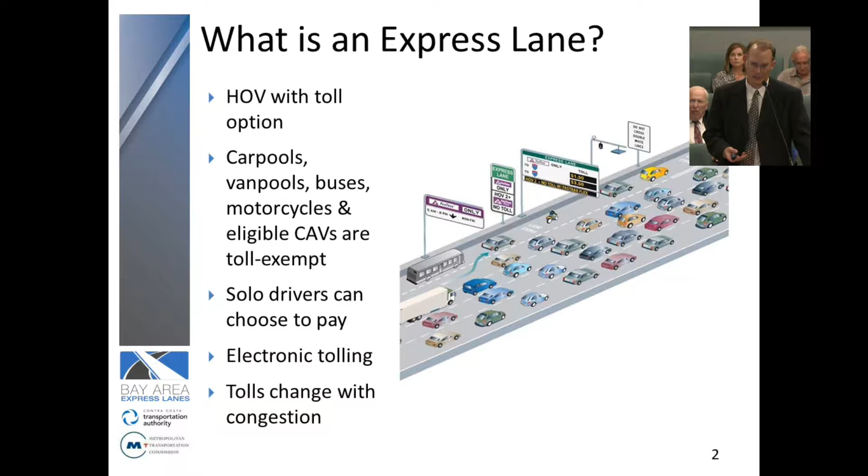An express lane, as you've probably seen driving the corridor with this sequence of signs, is a facility that allows single occupant payers, toll payers, to make use of the capacity in the lane. If you're an HOV today, you use the express lane or HOV lane for free. In the future, when it's an express lane, you'll still be free, along with motorcycles and clean air vehicles. If you're a solo driver, you could pay to use it with a toll tag or toll transponder, coming up here in the slide.

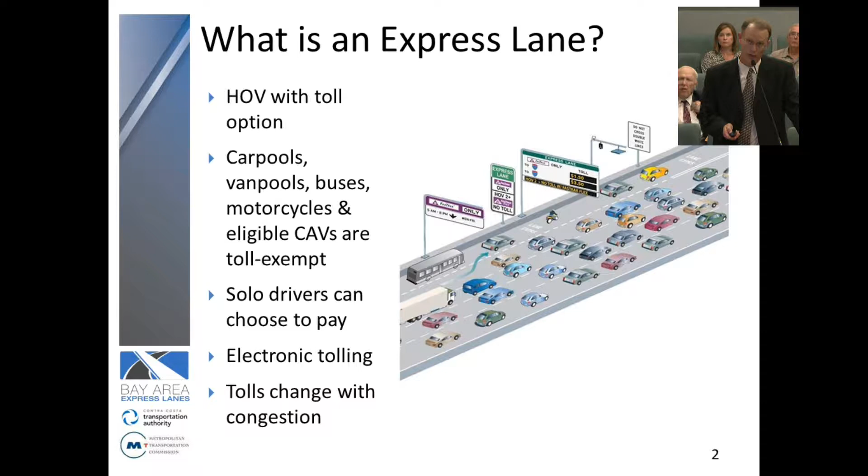The idea behind these lanes is to encourage carpools, van pools, and express buses to make use of the lanes as they do today, and allow for the best use of the remaining capacity by selling it, drawing cars out of the general purpose lanes to reduce congestion and giving the buses and HOVs a reliable travel time in the express lane.

The operating hours for the facility opening next Monday, as well as the facility we're talking about tonight, will be from 5 a.m. to 8 p.m. That makes it consistent with the hours of operation along 580. If you've driven that corridor, you've no doubt seen that facility. All Bay Area express lanes will have the same hours of operation, rolled out on the various facilities from 5 to 8 as we move through their development.

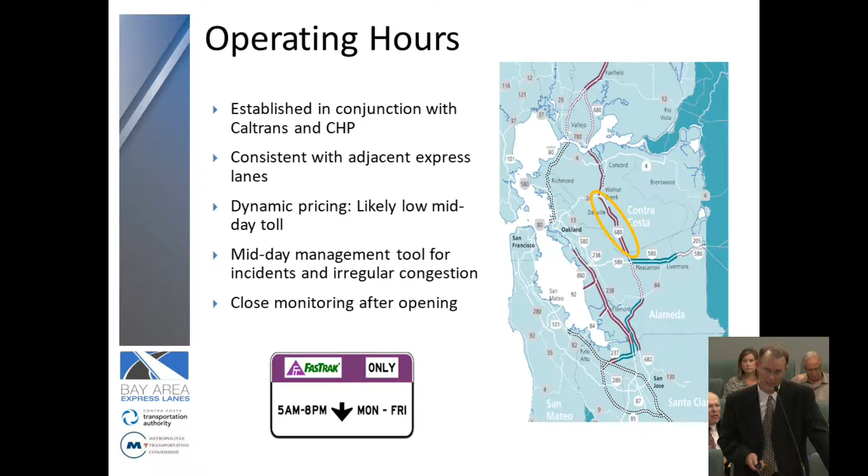That allows for midday management of incidents along the road, and it allows for close monitoring. There will be close monitoring throughout the process as the lanes open and work their way into a long-running operation. All right, and how do we enforce that?

As the vehicles pass by the CHP, the system identifies them based on what their toll tag says, whether they're a single occupant or a carpool. If it's a carpool and the CHP can observe there aren't sufficient passengers in the car for it to be a carpool, then they would pursue that car and pull them over for an enforcement stop.

The revenue allows for enhanced enforcement in the form of more CHP officers. CHP officers are contracted to enforce the lane specifically, as opposed to what happens today on a regular carpool or HOV lane, where the CHP just does it as part of their routine budget and simply don't have sufficient funds to maintain specific enforcement of the HOV lanes.

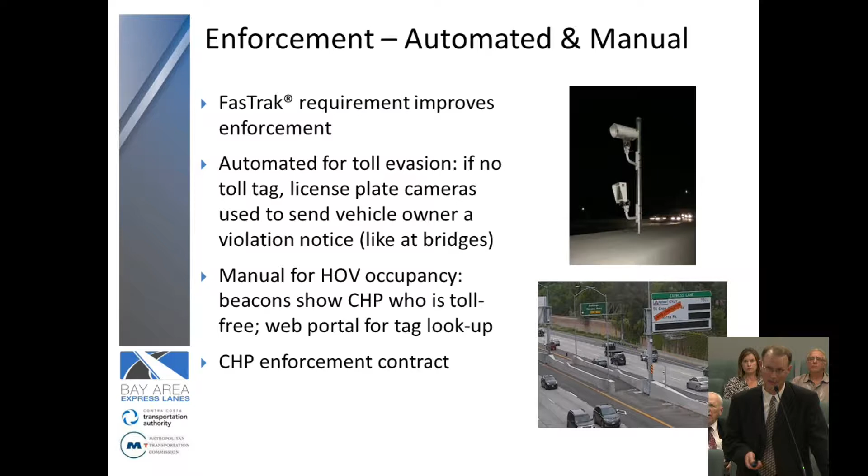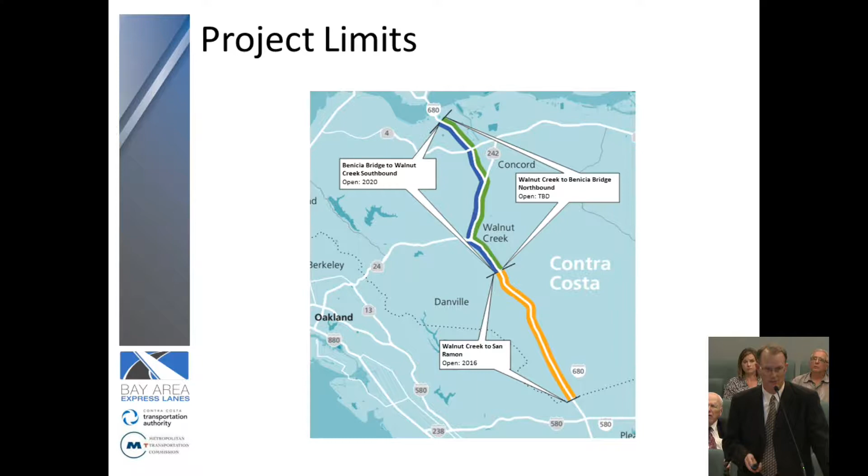So to shift gears, the southbound project we're talking about tonight runs from the Benicia Martinez Bridge, the blue line on the left side, all the way down to Rudgear, where it connects with the current facility being opened here on Monday.

The timetable for this: we've been working on the design through 2016 to 2017, but we're approaching the point now where we're getting ready to do the utility relocation and tree removal. Construction will run through 2018-19 and then into 2020, because we have quite a bit of testing, as you've now witnessed on 880, to make sure the toll system is operating properly. Ideally we open in late 2020, but with rain and other things we might experience, 2021 could happen.

We will have a buffer that starts as you drive southbound, starting at about the 242 interchange. That buffer will extend all the way down to just about North Main Street, where it opens, allowing vehicles to get out of the facility to reach 24 westbound. Similarly, it'll be open until you get south of the 24 on-ramp to 680, and then it will close right about Rudgear and stay closed for access until you get down to about Stone Valley Road.

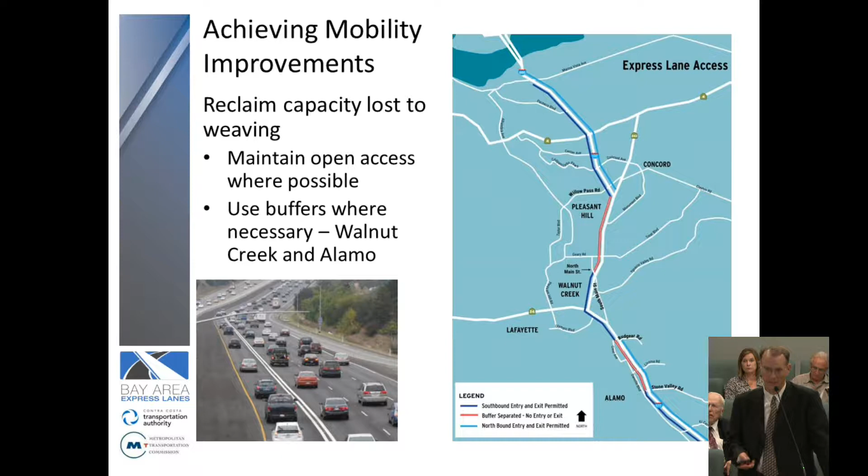In order to do that, the HOV lane today stops at Treat and picks back up at Rudgear. We need to connect that, so we have to widen the freeway. We're widening a bit in the North Main Street area, primarily around the North Main Street on-ramp, and again we have some widening to do right at the Ygnacio Valley on-ramp.

Most of the added width is already available in that area, so most of what we'll create is restriped lanes. Once you get south of Olympic, though, Caltrans has required us to widen the freeway, so we're going to tear down the wall that's there today and move it 10 feet outside of where it is, toward the city street, in order to add the lane in that stretch. So there's widening work there, and also widening at the Rudgear on-ramp.

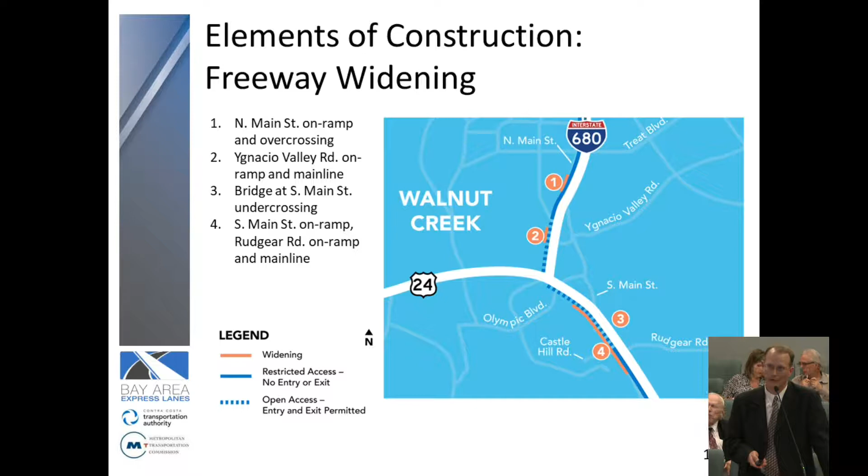So, city improvements. As part of what we're going to do in the city of Walnut Creek, we will be undergrounding some utilities at the interchange. We will complete the sidewalk on South Main Street between Sunnyside and Brookdale Court, add new signals at the South Main Street on-ramp, resurface South Main Street between the overcrossing and Sunny Court, add a lane to the Rudgear on-ramp, and replace the trees we take out in order to conduct the widening.

The timeline for this is a little unusual because we have some gaps, and that's one reason we wanted to present this to you. We'll start with utility relocation later this month, then remove the trees. The trees have to be removed when nesting season isn't occurring, so we can remove trees November through the middle of February.

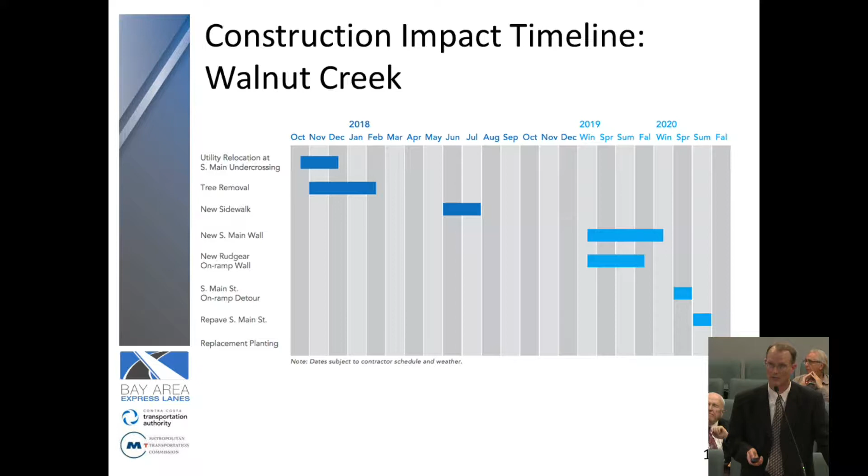Then you won't see a lot of activity because we'll be advertising the main contract, which begins in spring. What you'll see to start the work is the sidewalk reconstruction. There will be a fair amount of work up on the freeway before we actually remove the wall, which you won't see until 2019. The last things I want to highlight are the repaving of South Main Street towards the end, and the replacement planting in 2020.

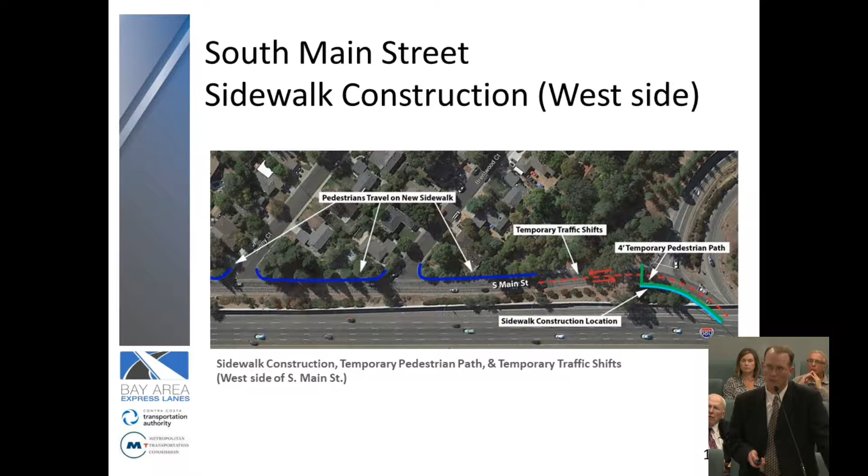There will be some other improvements to the sidewalk right around the off-ramp interchange. We're going to reconfigure that, so there'll be some work there as well. And here's an image of one of the stretches where the sidewalk will go in.

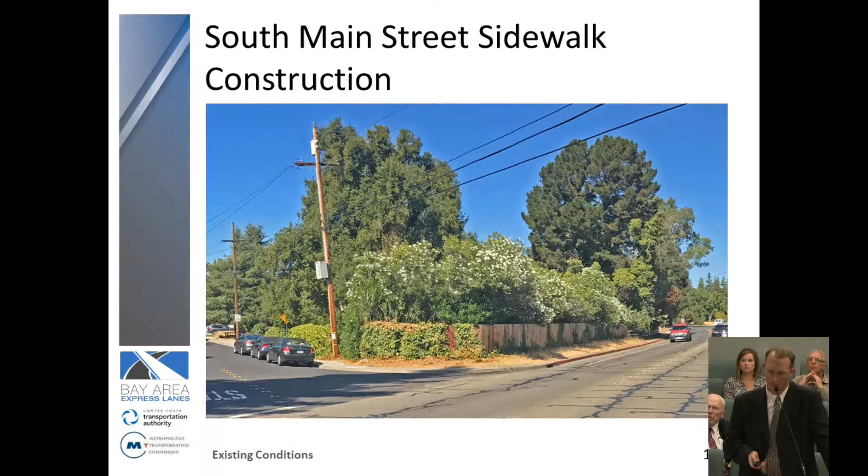One of the other things we have to do is reconstruct the loop ramp, the loop on-ramp, because of the configuration of the widened structure—we have to climb faster. To do that, we've got a grade difference of 6 or so feet. You can't close that gap overnight, so we'll have to close the ramp for about two weeks.

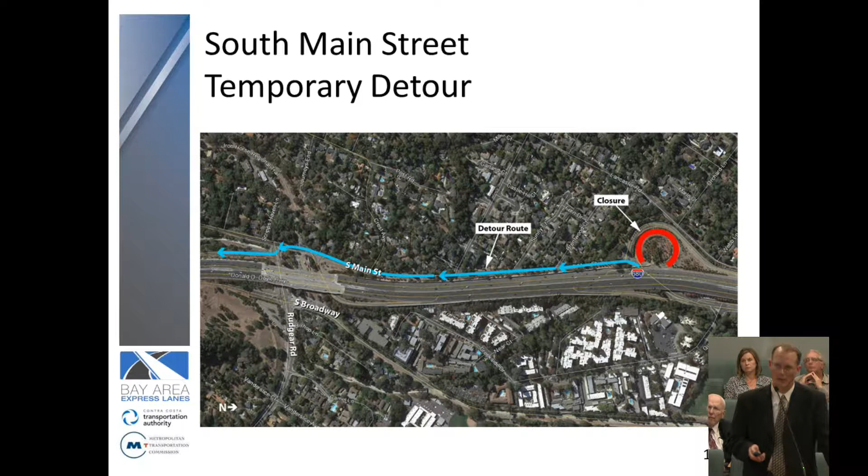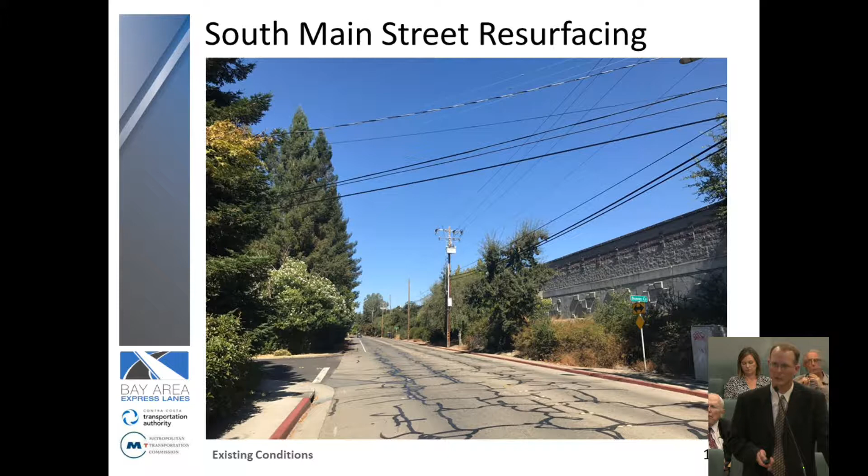When we do that, which won't be until late 2019, we'll have a detour running vehicles choosing that off-ramp or on-ramp down South Main Street and then onto the new Rudgear on-ramp. Then we'll come back and resurface the street after we've driven over it with extra cars and construction equipment to get to the work, and that's the last piece of work.

What we wanted to finish with was to let you know how we intend to communicate with you and your citizens about the project. We've been at work over the last couple months—one thing is launching a website, and we've held a number of meetings with council members, the mayor, and staff. As we move toward beginning the work, we're launching a project hotline so citizens have a place to call as well as a website to turn to. We also intend to launch a quarterly newsletter.

That will go out tomorrow to introduce the neighborhood meeting on October 25th, which will be at Parkmead Elementary School, the venue we've held prior meetings at for the project. Caltrans and CCTA felt it was important for us to meet there again, so we'll be back at Parkmead on the 25th.

We will continue to coordinate with the Walnut Creek communications team to keep your staff abreast of what's going on. Prior to the closures and detours over the next 2 to 3 years, you'll see signage, detour maps, and press releases as well, so we'll try to keep you well informed as we move along. With that, I'll conclude my remarks and take any questions.

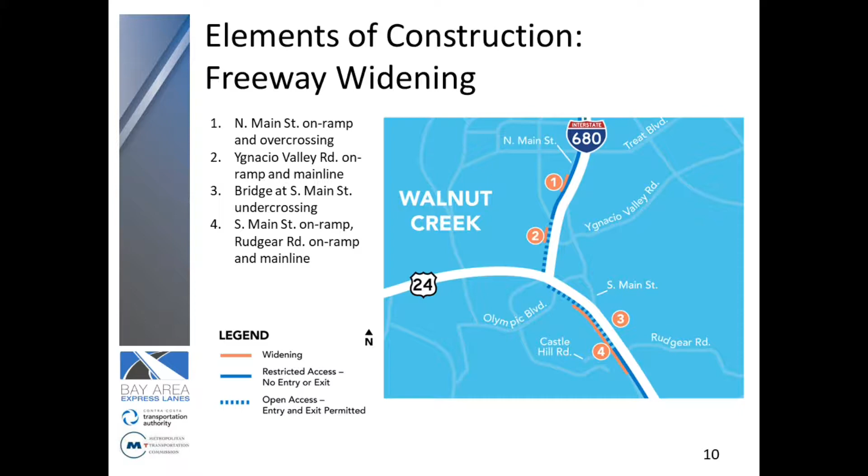Part of the work will be done prior to the demolition of the wall. We actually have to create a retaining wall behind it in order to tear it down and rebuild it. That work will be done at night before the wall comes down — driving piles to create a retaining wall to hold back the dirt that the current wall holds back. So that'll happen before the wall comes down, and then it gets rebuilt, and that'll last about 11 months.

I was recently talking with a friend who lives near the interchange and went through about 2 months of night work right above his home, during the widening for the interchange 25 years ago when the flyover changed. He said they were housed at night in a hotel for a couple of months because of the amount of work and the noise. Are you looking at that as a potential mitigation for the people who live right next to this? We have not looked at that.

The noise from the work that will take place here will happen during the day, not at night. So the night noise will just be the traffic on the freeway — traffic that you can currently hear, or at least it's mitigated because of the sound wall.

We're looking at doing the brunt of the construction during the daytime, especially the noisier things. I believe the piles will be cast-in-drilled-hole, so those won't be quite as noisy. We are concerned because of the length of time the sound wall will be down and the noise levels, so we will be out there observing and monitoring, thinking about what we can do. We considered whether there's somewhere for a temporary wall.

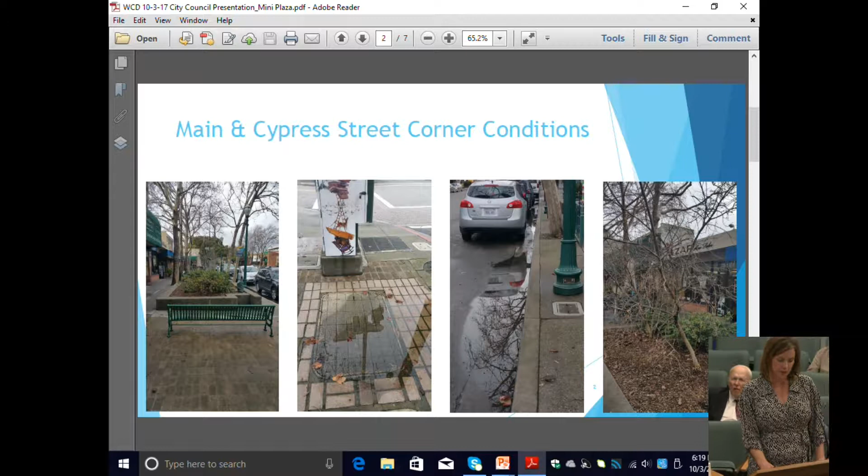Earlier this year, City Council authorized funding for Walnut Creek Downtown to lead the creation of a mini plaza in the traditional downtown, located at the corners of Main Street and Cypress Street. Today there are a couple of photos of what it currently looks like.

To give you a recap of our project progress to date, in February of 2017, Council allocated additional funds of $847,500 to completely fund the project.

Once the design concepts were begun, along with the engineer, an engineered physical survey of the site was included. It was determined that Main Street drainage patterns would be significantly and adversely affected, so impacts would require an additional $300,000 for storm drainage solutions.

To be clear, we are not here to ask for an additional $300,000. We understand that we need to be fiscally responsible, and as a result, we adjusted the plans to include the existing drainage. Then last week, we received the updated designs.

This evening we have our committee members, which include Brian Harahara and Joseph Gorney, and I'd like to introduce Joseph to give you an understanding and a recap of our current design.

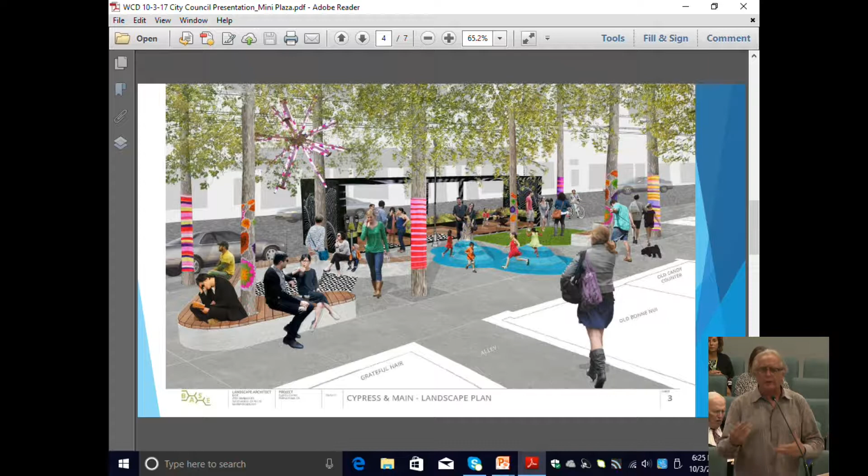Well, thank you, Kathy and Joseph. It is unusual to see you on that end of the podium, but do we have any questions? Cindy looks like she's got a question. Thank you very much.

So give me an estimate of the time frame now. I have no idea, to be honest with you. I think spring, they're looking, that's right, it's in here actually in the drawings. If you want to continue in the drawings, you can see some of the other pieces. I believe they're looking at starting in spring of 2018.

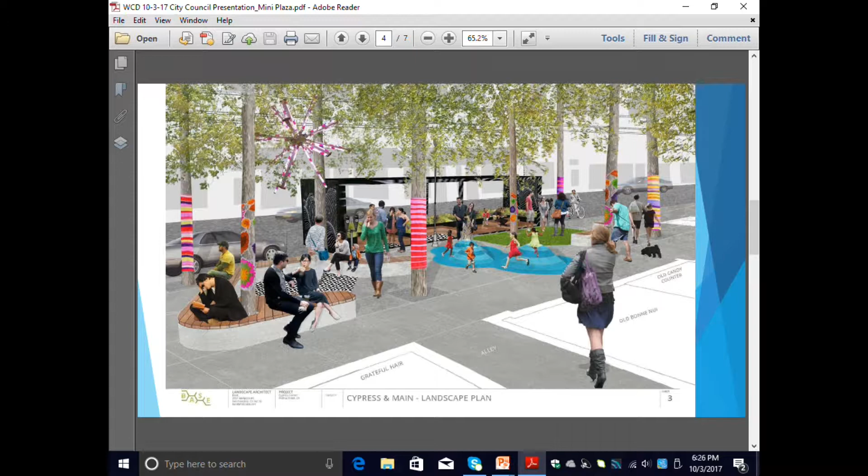I think you get to move the drawings. Oh, that's right, I have to. Can I just tell somebody else to do this? Here we go, okay, let's see.

Spring 2018. So as you can see here, we're doing the design concept now. We're going to talk to the neighboring businesses and property owners, a little bit of community outreach in the neighborhood over there. Construction beginning after the holidays.

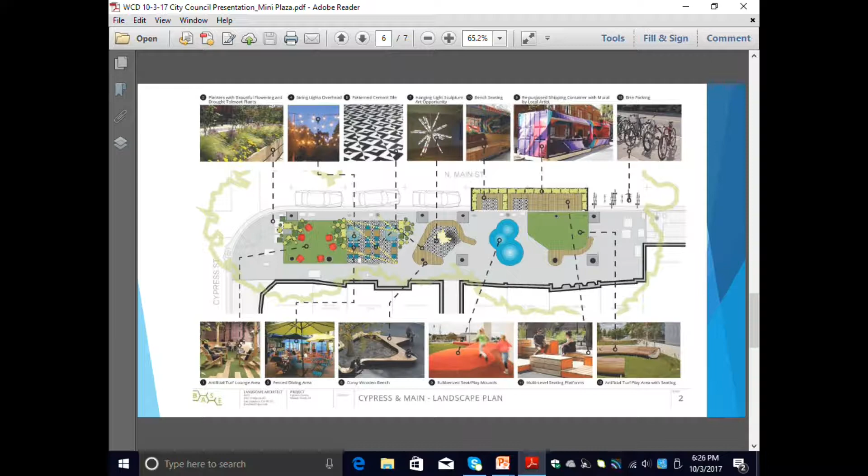Can you go back to those other drawings? These are some drawings that are just images that Andreas put together based on other things that they've done and other people have done. So this preserves 3 of the parking spaces when the temporary piece is in. Otherwise, it could conceivably preserve all of the parking spaces. Yes, and we looked at parklet ideas and different things, but because of drainage issues, we didn't want water sitting underneath them all the time, so it didn't seem to be the best solution. And whether we use 2 or 3 or 1, or split them, it's something we're still exploring.

Any other questions?

Again, thank you very much. I think it's an exciting idea, exciting approach. I'm curious to see how the container would actually fit in. And I love the yarn art and those types of things that are on the trees. Again, great, thank you very much, Joseph and Kathy. Appreciate your presentation. Thanks for taking the time.

Okay, now I'm going to take something that's not necessarily on the agenda, but as you look around our police officers, you're going to notice a patch that looks like this. It's a Walnut Creek police patch with some additional additions. I'm going to ask Lieutenant Jay Hill to come up to the podium and explain what this program is, because it's a very important program for every member of Walnut Creek to know about.

It's Captain Hill. Did I say Captain? You said Lieutenant, but that's okay. Oh, I'm sorry, I'm not quite all up to date. Captain Hill, thank you, Mayor and City Council members, for giving me the opportunity to discuss this real briefly.

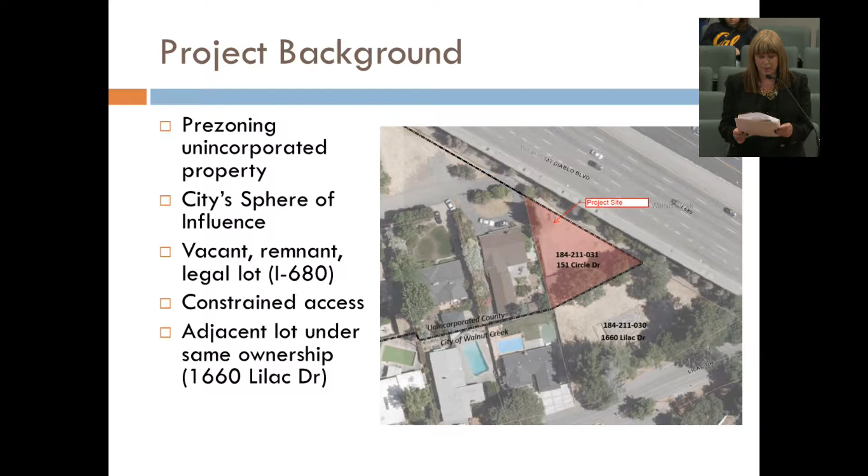The pre-zoning application is for a vacant triangular-shaped property at 151 Circle Drive. It is located within unincorporated Contra Costa County and also within the city's sphere of influence, indicating that the city has previously contemplated inclusion of this property within its limits. It is a constrained remnant lot created by the widening of Interstate 680 in the 90s, and given the unusual triangular shape, the property currently does not have access to or from the adjacent roadway at Circle Drive.

The applicant for the property at 151 Circle Drive submitted an application to the Local Agency Formation Commission, also known as LAFCO, in March to annex the property into the City of Walnut Creek. As stipulated by LAFCO, the land must be pre-zoned prior to annexation so that when the land is annexed, the zoning has already been determined. The applicant then submitted an application to the city in June to pre-zone the property to single-family residential R10 zoning district.

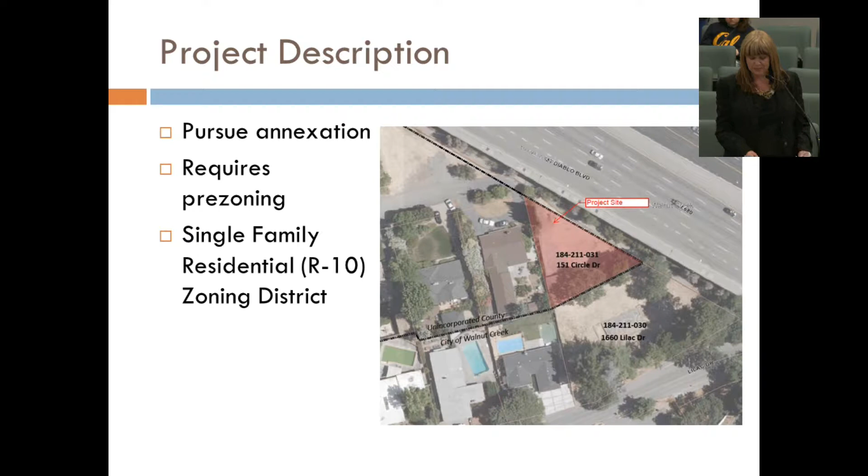To give you a quick overview of the annexation process, pre-zoning is just one of a series of steps, which also includes confirmation to LAFCO that the master property tax exchange agreement with the county applies in this instance, and provision to LAFCO of a will-serve letter that the city will provide services upon annexation. Both of those actions have already occurred, so pre-zoning is the final action before you tonight. Should City Council approve the pre-zoning, LAFCO will then make their decision whether or not to approve or deny the annexation.

Staff conducted a consistency analysis and found that the proposed pre-zoning is consistent with the regulatory and surrounding physical context. The project site is located within the sphere of influence and has a general plan land use designation of single-family medium residential, which is consistent with the proposed zoning.

The proposed zoning is also consistent with the current zoning on the site under the county, which is also R10, and it's consistent with all of the adjacent properties, which are also R10 single family residential.

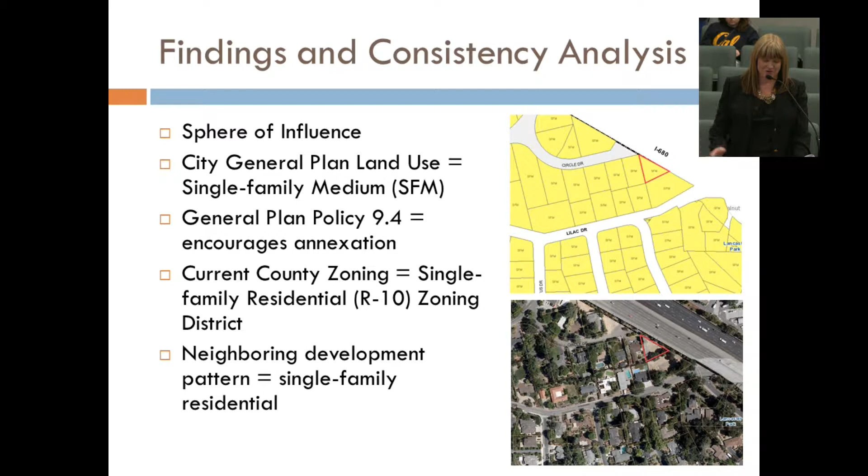We took this to the Planning Commission on August 24th, and they provided a positive recommendation to City Council to pre-zone the property to R10. There were a few points of clarification during that meeting, and through discussion it was confirmed that utilities would continue to provide service upon annexation, that access to the site could be provided from the lot to the south, also owned by the same property owner, and that the lot would meet city standards with a lot line adjustment.

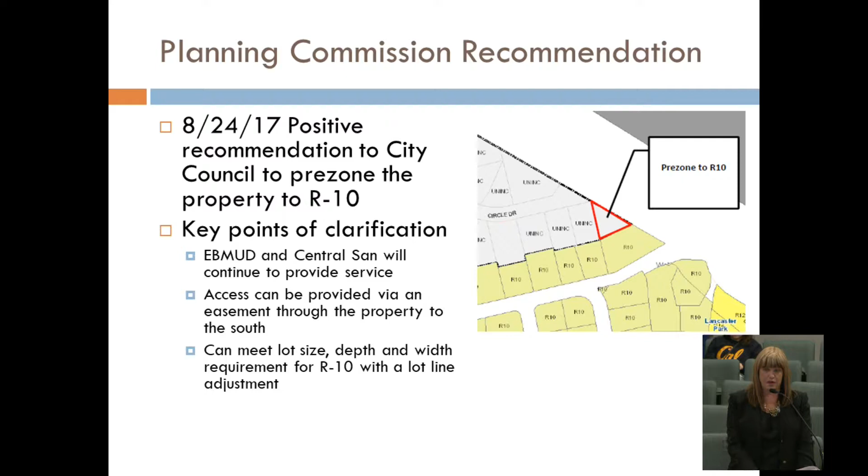Staff recommends that the City Council introduce and waive further reading of the ordinance as shown in attachment 1, to pre-zone the subject parcel to the single-family residential R10 zoning district. Such zoning will become effective upon annexation of the parcel into the city of Walnut Creek. This concludes my presentation, and we are now available to answer any questions.

Thank you. Thank you very much. Any questions? Go ahead, Kevin. Thank you very much, I just have a quick question.

Is there a downside to us not annexing? That is a good question. I would say the downside to not annexing is that the property will likely continue to remain vacant with a deteriorated garage on the site. So the downside is really blight, by not annexing. Right. Okay, thanks, that's it.

Cindy? Can you clarify the amount of the size of each of the two parcels, both the one on Lilac and the one on Circle? The one on Circle Drive is just under 8,000 square feet, and the one at 1660 Lilac Drive is almost triple that, about 22,000.

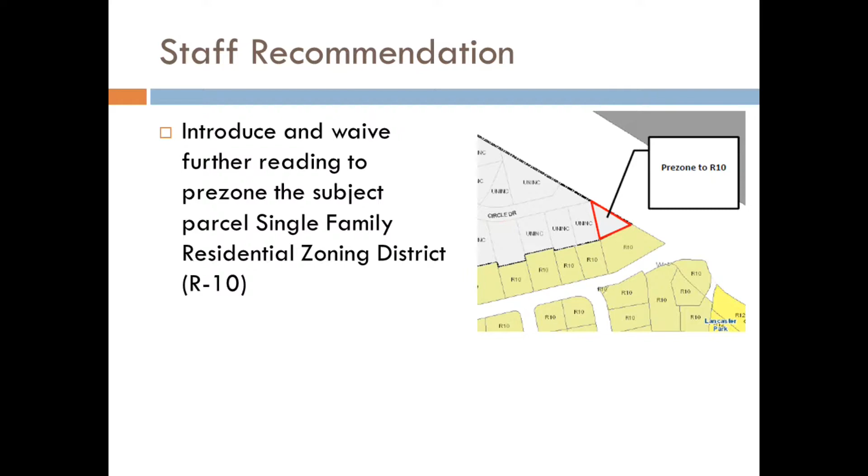Okay, so the subject parcel is 7,843 square feet. The 1660 Lilac Drive is 21,298 square feet. So about 29,150 square feet total, just short of 30,000 square feet.

Now, this is proposed to eventually become two lots at R10, which is basically our 10,000 square feet residential. Correct. So the two lots will be larger than that. Is there no way, or why is it not possible to put 3 lots on the site?

In order to provide access to the 151 Circle Drive, an easement would be required, a minimum of 16 feet wide to accommodate a fire apparatus. That area is then deducted from the lot area when calculating density. So the unusual shape and the constraints of the...

Thank you. The next question I have is, are we approving with this any entitlements to build? No, today we are simply looking at pre-zoning the property. It's then in LAFCO's court whether or not they approve the annexation. Then for any future building, the applicant would need to submit an application for what's being actually proposed to be developed on the site. And since this would be 2 single-family homes, that would basically entail design review and planning for the subdivision, the lot line adjustment.

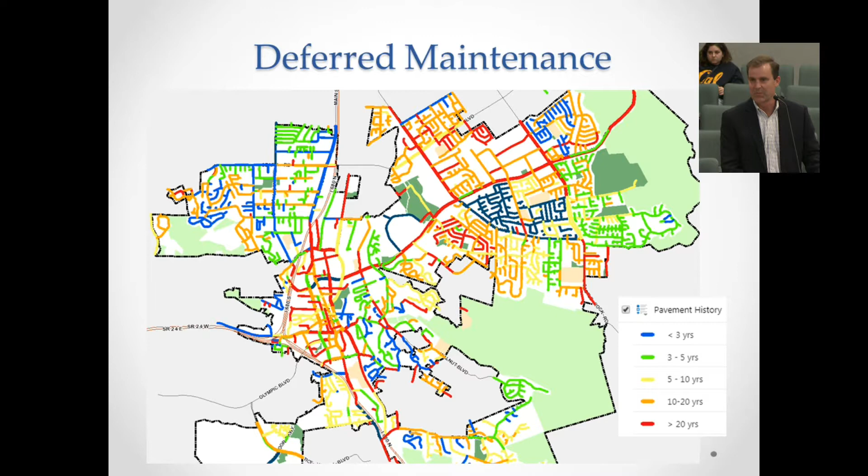Also, when a speaker mentioned Cedro Avenue and Foothill Middle School earlier, we did slurry seal the whole neighborhood between Walnut Avenue, Dover, Cedro, and Blackstone. That was also a $1.5 million slurry project to preserve those roadways. So we still have a lot of work to do - I see Cindy looking at it closely, we can talk more about these, I could talk all day about this stuff.

Zooming in a little bit to talk about what we have upcoming.

The first one, in the lower right, is a segment ID. Each of our streets, broken up intersection to intersection, is logged in a database, so we have all the information. In the lower right corner is segment ID 14950, that's Oak Grove Road. Last activity was 1982, when we did a 1.25 inch overlay. So we're going on 35 years since the last work there. We actually have that scheduled for work next year.

I also want to call out the Woodlands neighborhood in the upper right corner. I pulled one of the streets in that neighborhood. If you drive those roads they actually look like they're in pretty good condition. However, they were paved 16 years ago. That's a long time to be exposed to the weather, and they're beginning to crack and show the first signs of weathering. So to be proactive in our maintenance, we've scheduled a slurry seal in that neighborhood in 2019, where we seal the cracks and put a protective slurry coat over the roads, which really extends the life of the road by forestalling UV degradation.

The last one I have is an arrow pointing to a portion of Shadelands, segment ID 19000. Initial paving was 1979, and you see no further action scheduled - it's not even on our list to pave. I will say we work in close partnership with our street maintenance department, and they were out on Shadelands doing patch repairs in the last 2 to 3 weeks. So we're doing what we can with our limited funds to stretch our dollars as much as possible.

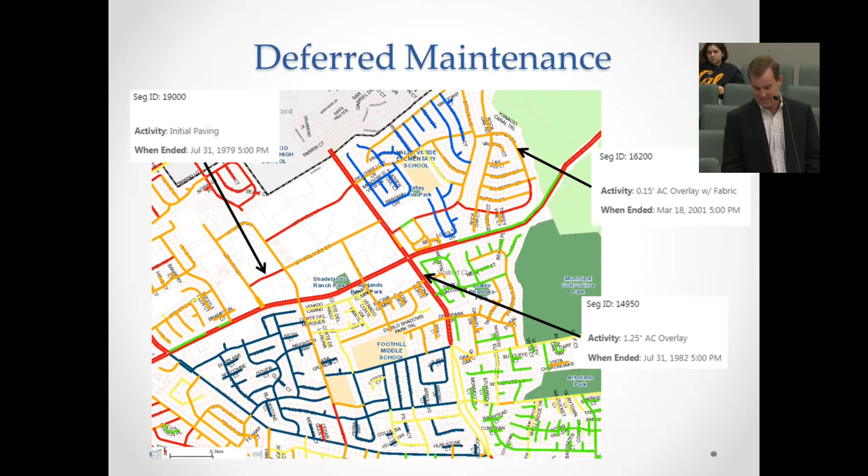So, roadway maintenance funding. Our existing gas tax is approximately 1.5 million. It's important to note that about 600,000 of that comes off the top per year and goes to our street maintenance division, which we work in partnership with. So the capital portion is about 900,000. Measure J, return to streets, local streets and roads component, provides about another $850,000 a year. General fund, depending on the year and other needs, runs between 0 to 400,000 - this last 2-year cycle we put $400,000 per year towards roadway maintenance. And grant funding is out there, but it's intermittent and variable, not something we can necessarily count on to get our work done.

But it's complicated, and also very volatile. In 2010 they did what's known as the excise sales tax swap, to get around some constitutional issues with bond repayments, and it's led to a significant amount of volatility in the revenues we see on the city and county end of things. I'll also note that the gas tax has not increased since 1994.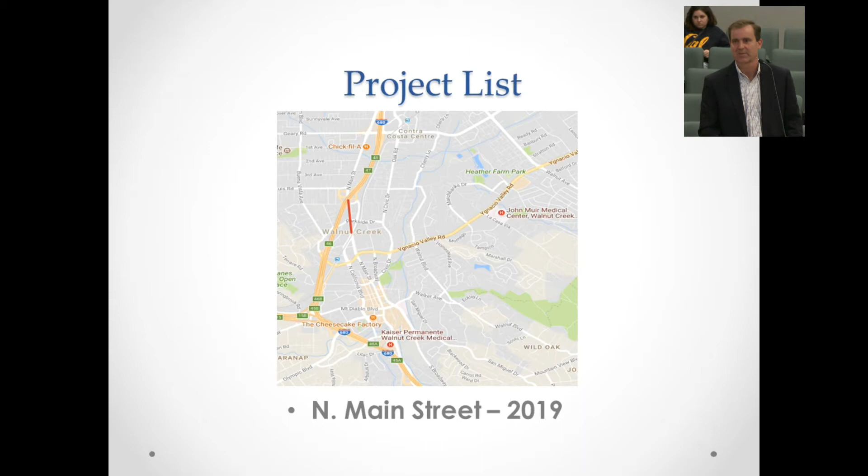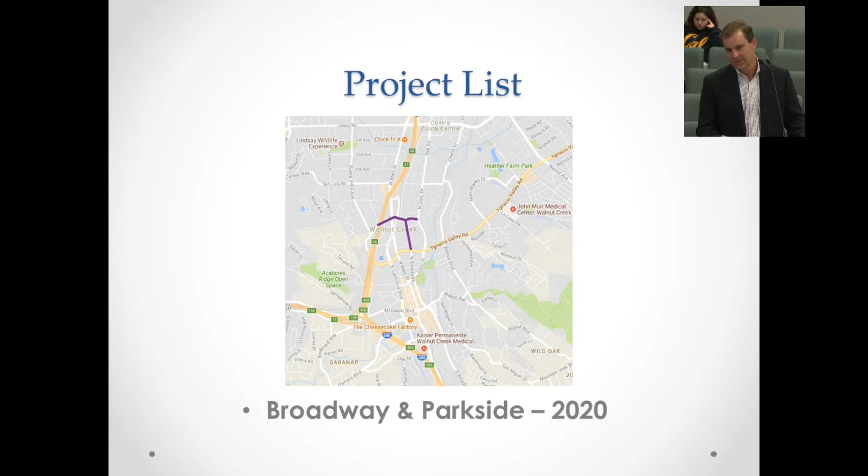In 2019, we're also proposing and planning to repave North Main Street. This would be south of the freeway to where California Boulevard splits. If you've driven that section, it's about half crack seal, half asphalt at this stage of the game, so it's due. Then in 2020 we have plans to pave Broadway north of Ygnacio and the length of Parkside Drive, both of which are also in dire need of paving.

So again, the purpose tonight is the recommended action is for council to adopt a resolution to amend the 2016-2018 capital budget to incorporate the additional project information as required for SB1. I'm available for any questions.